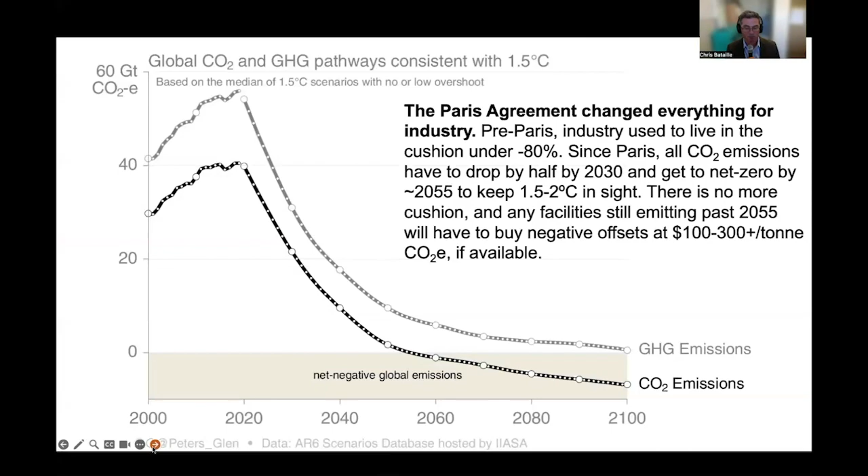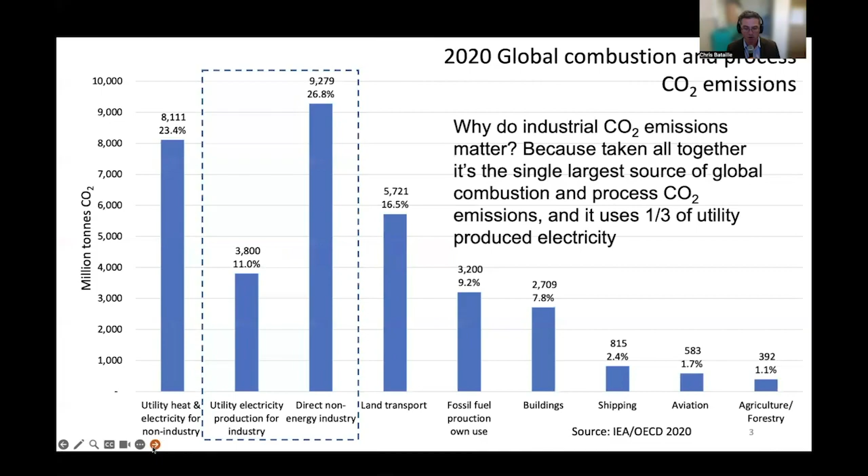Now, why do industrial CO2 emissions matter? Because, taken all together, they are the single largest source of global combustion and process CO2 emissions, and they use 1/3 of utility-produced electricity. The biggest emitters are normally iron and steel, cement and lime, collective other industry, which is mainly for steam, and the chemicals industry.

Now, the other industry and non-ammonia chemicals are abnormally low in the chart I'm showing you here, because this is from 2020, the latest sectoral data we have, and it's due to lower than usual demand due to COVID. And as the 2021 and beyond data comes in, we expect those sectors to rebound.

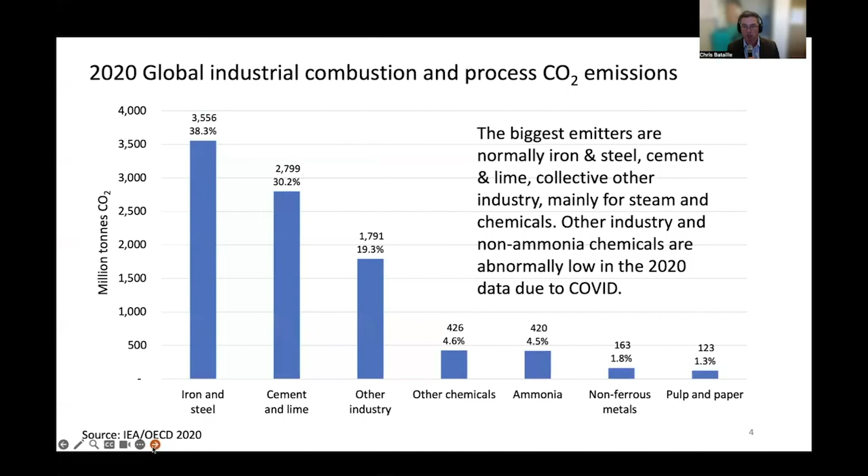So how do we do it? There are 6 broad strategies for industrial decarbonization. First is demand and material efficiency, where we use design and building codes to minimize GHG intense materials. And we expect that about 25 to 30% of iron and steel and cement and concrete demand can be reduced simply by making architects, structural engineers, and construction companies conscious and aware of the use of these materials and limiting them on purpose.

Then there's circularity, which in the practical nuts and bolts terms is more recycling. We want to maximize the high quality metals and plastics reuse and recycling. And this is especially important for iron and steel. Both iron and aluminum actually are potentially infinitely recyclable materials. But if they get contaminated with other metals, and in iron's case, that's copper, then they can be used only for a limited set of end uses.

So we want to recover as much iron product from the economy as we can, and we want to separate out as much of the other metal as we can to keep recycling it through time. Then there's energy efficiency, but because iron and steel and cement and concrete are so energy intense to start with, we tend to have maximized that energy efficiency with the existing processes we have. There are some systemic efficiencies that are available, but to get big jumps in energy efficiency, we need to move to new processes.

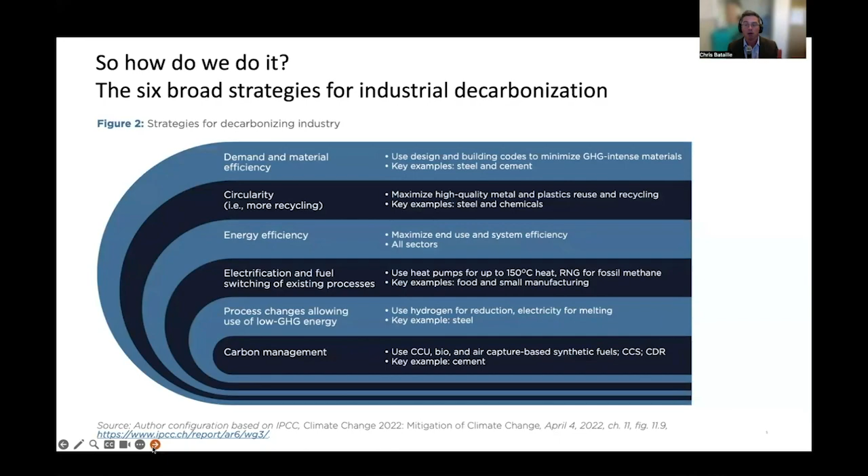And I'll be talking about how we might use hydrogen instead of coal as the primary chemical reductant in iron and steel making. And then we have our backstop, which is carbon management, where we use carbon capture and utilization, bio and air captured synthetic fuels, carbon capture and storage, and potentially carbon dioxide removal to recover those remaining CO2 emissions that we put out in the atmosphere. And also in the case of CDR, bringing down the atmospheric concentration of CO2.

How do we make steel and how do we make it near zero emitting? First of all, we want to maximize the recycling, typically because we recycle using scrap using electric arc furnaces. If we decarbonize the electricity, then we've largely decarbonized the production of that steel. But currently today, about 25% of steel is made through the secondary or recycled route, and we want to take that up as close to 50% as we can by mid-century. We want to use material efficiency, obviously use as little steel as possible.

But after that, we start looking at decarbonizing the core primary iron making process, where we separate iron from oxygen in iron ore. Most of that today is done with coal in blast furnaces. We use coal to make coke and coke to make carbon monoxide. And it's the carbon monoxide that carries away the oxygen in iron ore, leaving elemental iron, which we melt and then process into steel.

There is another process that was pioneered in the 1970s called direct reduced iron furnaces, where we pelletize the iron ore. We typically use gas as the reductant. So we break the methane or the gas into hydrogen and carbon monoxide. We pass that reduction gas over the iron ore pellets. And the carbon monoxide, when it oxidizes to CO2, provides the heat. And then most of the oxygen is carried away by hydrogen.

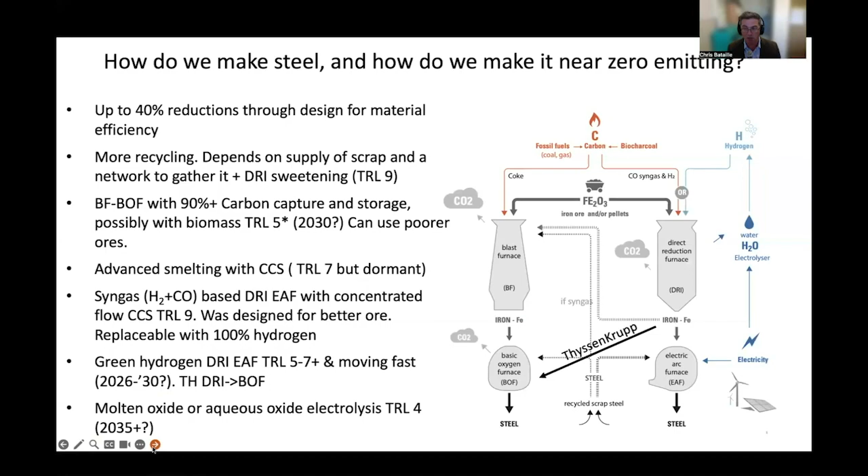Now, to make it simple, the short version is more material efficiency, more high quality recycling, get the copper out of the scrap, switching from coke to hydrogen for reduction, and CCS.

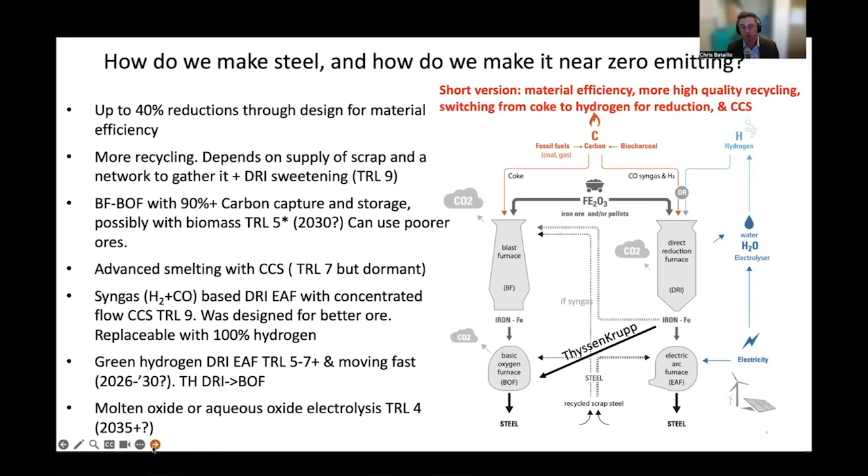One projection of a successful net zero transition for steel can be found at netzerosteel.org. If you look at the top left there's a projection for global steel demand rising from just under 2 gigatons to over 2 gigatons. The red is blast furnaces. They're all transitioned out by 2050. The yellow is secondary recycled steel going from roughly 25% to 50%. And then the remainder, the shades of light green, are different technologies for reducing iron ore to elemental iron.

If we look at the regional pictures, they all look quite different, however. So if we look at China just to the right, you see demand has come down from just about a gigaton to roughly 600 megatons. The blast furnaces are gone. There's quite a bit more recycling, and there's clean primary iron ore reduction.

India is the reverse picture, where demand goes from just over 100 to over 350 megatons. The blast furnaces are gone. There's some recycling, but it's mainly new clean primary or potentially imports of clean steel or clean briquetted iron that allows it to produce the steel that it needs. The European Union kind of peaks, does more recycling. The United States keeps on growing a bit, mainly recycling with some clean primary.

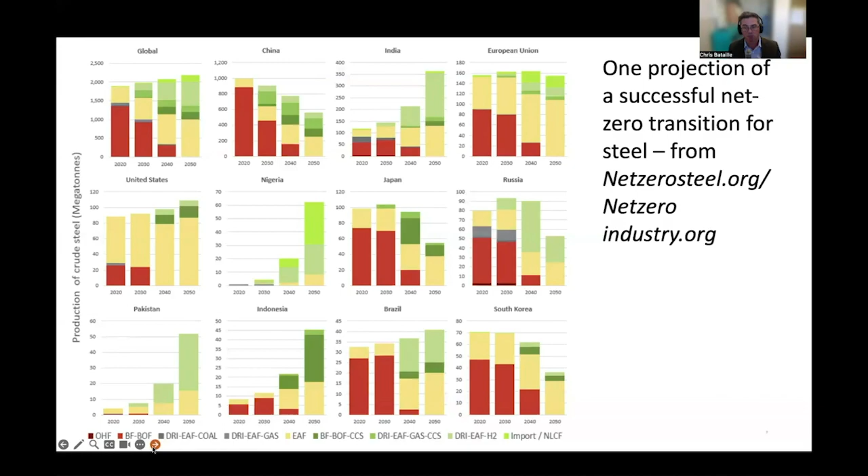But what I'd like to draw your attention to is Nigeria, Pakistan, and Indonesia on the bottom left there, where demand goes from almost nothing to very large and substantial amounts, just for basic building of energy, transport, sanitation, water infrastructure. We need to find clean means for these countries to make steel, for them to carry on their basic development.

Moving on to cement, the primary demand for cement going forward is likely to be mostly outside the OECD, China coming down a bit, India growing, other countries growing.

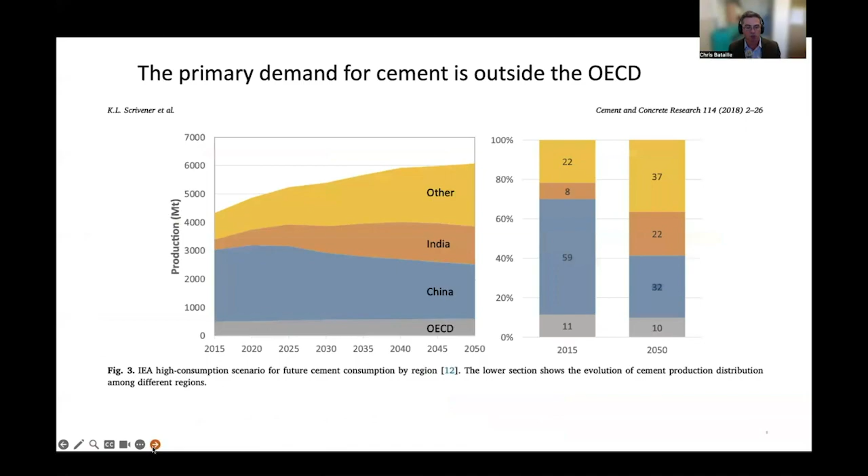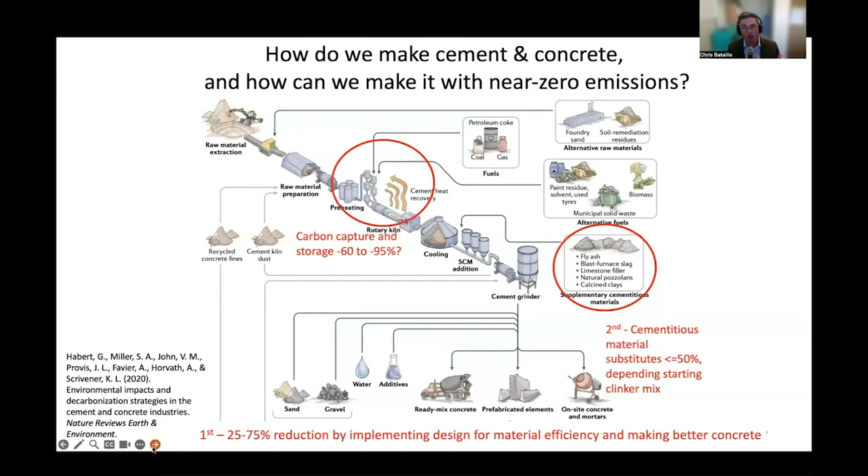However, we're still going to need clinker across both the developed and developing worlds. And if you're making clinker in a kiln, you're going to have process emissions. And if you have process emissions, you're going to need carbon capture and storage. And this is where the largest costs impose themselves. Everything else I've talked about here costs roughly the same as making concrete the normal way. Using carbon capture and storage to decarbonize clinker production could double the cost of the clinker, not the concrete, but the clinker. And so first we have to make sure this technology works, we have to commercialize it, and then we have to disseminate it across the world one way or the other.

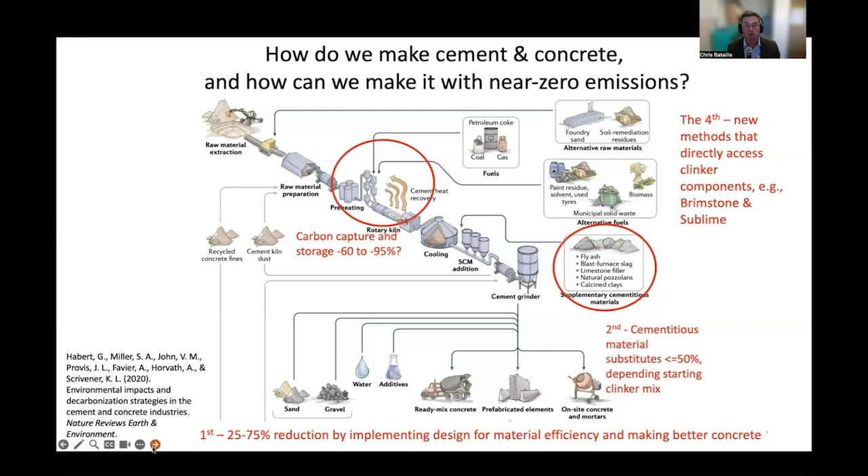Fourth, out on the horizon, there are new methods that directly access clinker components, the calcium oxide that we need, using acid leaching potentially, which is the Brimstone technology, or electrocatalytic methods, which is the Sublime technology. Brimstone in particular can be potentially negative emitting if you start with certain types of geology, because the waste materials start absorbing CO2 from the air. But it's going to be some time before these technologies are universally available globally.

Now for some combined strategies for a local policy package. First, a multi-level policy commitment to transition to net zero GHG industry is needed at all levels. Then we need building code, design, and recyclability policies for material efficiency and circularity. A transition pathways planning process, including all key stakeholders to assess strategic and technological options, competitive advantages, and uncertainties. We're going to need accelerated R&D and commercialization, lead markets to build economies of scale with green procurement. This is something the OECD countries can get on right away. IDDRI in particular is active in this area.

Content regulations, supply chain branding, guarantee pricing, and output subsidies. So for all the clean iron and clinker we make, we could be offering contracts for difference today, where for every ton that comes out, there's a set subsidy for a certain amount of time, and this can be done by reverse auction to minimize the costs, much as we do for offshore wind. We can do eventual exposure of all sectors to full greenhouse gas pricing with competitiveness protections.

If certain jurisdictions start imposing very strong climate policy that requires expensive investments, you're going to need protection for those investments, or dirtier imports will just come in. But we have to make sure that those competitiveness protections don't penalize highly traded green commodities, and especially don't penalize developing countries that are just embarking on their industrialization journeys. And we might need early retirement if necessary for long-lived, highly GHG-intense facilities. And we're going to need supporting institutions as well for monitoring, for electricity, hydrogen, and CCS infrastructure, for life cycle accounting, regulatory backdrop, and firm and workforce education.